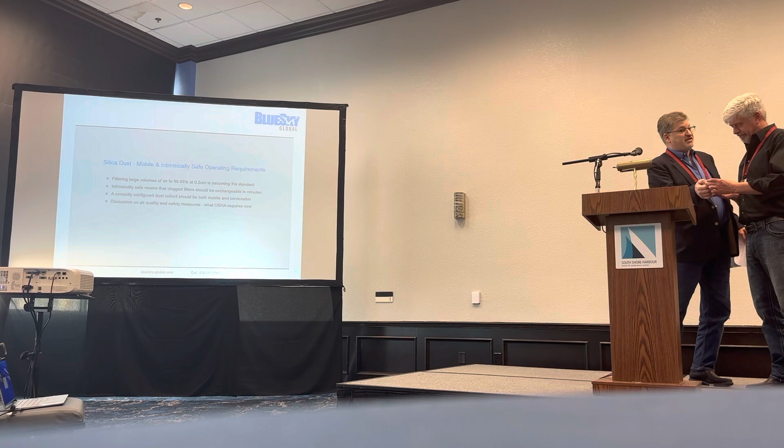So I'm going to be talking today about silica dust, particularly the type of dust you see around work sites that one breathes in. Typically, the experience of breathing in dust is that you'll get a gritty taste in your mouth, in your nose, that kind of thing. That is really not the dust we are particularly concerned about, because the body has quite good defenses against the dust you can see and feel.

So the stuff that we are concerned about is the stuff that can be breathed into your deep lung. And it's usually just nuisance dust, and we experience it in everyday life. The body is quite well adapted to dealing with it. People live in deserts and the wind blows.

However, silica has been discovered to be somewhat hazardous, even in low concentrations, but particularly over long periods at high concentrations. So this isn't really from medical studies per se. It wasn't an Erin Brockovich story. It was rather a statistical story, very much like dust that you find in woodworking factories, where they took a sample of people who never worked in a woodworking factory and compared their health over a period of time to people who worked at IKEA factories or something like that.

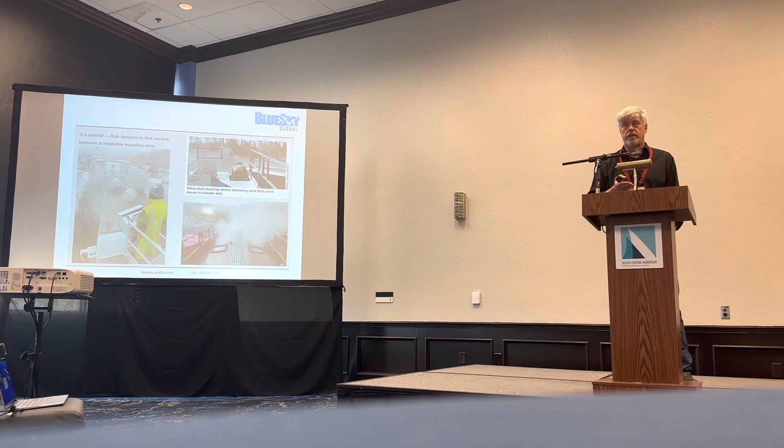So in a nutshell, OSHA is trying to limit, not eliminate, limit the exposure of people to the dust that they will breathe in.

So this is where dust collectors come into play. You see them on every frac site where dust is handled. These machines work. They have filters in them that are regulated, their efficiency is high enough that they comply with legal requirements, and they can be deployed.

I'm a mechanical engineer. I've spent my life working out at remote job sites, out in Kazakhstan, Saudi Arabia, India, terrible job sites. The problem with all equipment is not how it operates and what it's specified to do, it's this condition. It's where the job site is inconvenient. It's just darn difficult to work there.

So imagine you have to do a filter change in this environment. How do you do it in this machine? You have to open those doors. You have to pull 50-pound filters out, covered in concentrated, airborne, dust size fraction dust. That is a miserable task to do. So now we have the stuff that was floating in the air as concentrated cake on those filters. That somehow does not seem like the smartest thing that we can do.

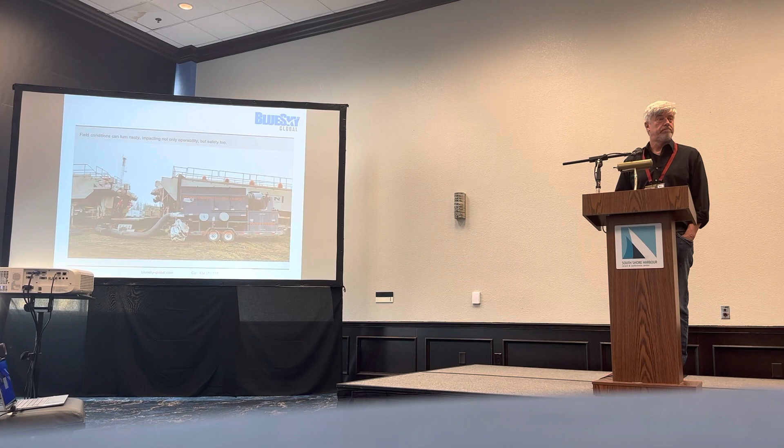Or the tires are flat. I'm sure you've all experienced that too. Now you've got to move the dust collector, relocate it, and one of the tires is flat. Well, you've got to change that tire. Or the engine's having trouble. These machines have pulsing systems. Often, when the dust collector goes offline, the battery is left connected, like leaving the lights on in your car. Now the battery's flat, the dust collector won't start. Or the engine has a problem, there's a bad diesel injector. So there are all sorts of real-world problems associated with operating a piece of equipment that is there for safety. So the equipment itself becomes the problem.

Filter changes. You say, okay, well, we don't ever see unscheduled filter changes. Most of the machines that go out onto site, their filters are removed from the top. You pull the filter, 50-pound filter, out through the top of the dust collector, through the clean air plenum. So think about that. You've got a loaded, spent filter, covered in dust. You are pulling it out through the clean air plenum. All the dust falls off that filter as you're pulling it out. So there's a man up there, it should be tied off. And the dust is falling off into the clean air plenum. How are you going to clean the clean air plenum?

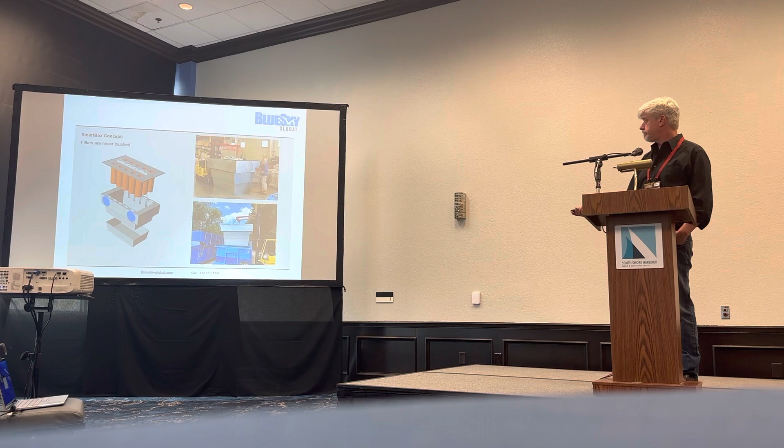Now because we've got a SmartBox, there are various options for what you can do with the dust. You can either capture it in drums or super sacks, transfer it with an eductor to a storage silo, or if you're putting it onto a transfer station on the conveyor, you can leave it open, capturing the dust from the conveyor and pulsing it straight back onto the conveyor.

We've all seen these huge transfer stations with the belts and a Donaldson or something mounted on top. Again, a nightmare to service. With this concept, you'd simply crane up a SmartBox. When it's time to change it, you take it down and put a new one up. No more servicing the filters, nobody touches it.

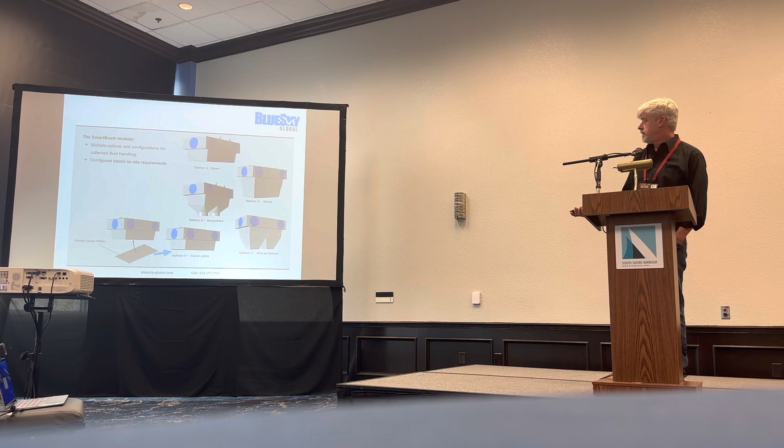As I said, there are various configurations you can use, plus more that we can embed to deal with that dust. One of our standard applications for sites that have bad ground is that we mount the whole system on a roll-off container. The dust can go straight into the belly of the roll-off, and you've got the dumping facility to recycle that. So this is one application where you can put about 10 yards of dust straight into a roll-off. When it's full, take the 10 yards, dispose of it, or just bring in a replacement unit and drive that off to somewhere convenient to handle.

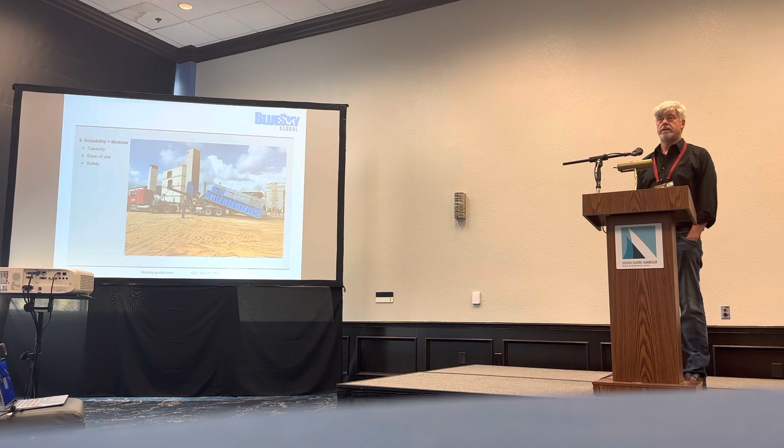So the beauty with a roll-off container, no flat tires. You can place that thing anywhere, in a mud patch, whatever. It's robust. It can be moved, it can be dragged. It's weather resistant, forklift resistant, and there's a lot of trucks that can move it around, remove it or bring it. So it's easy to relocate, easy to run.

Another thing with the modularization with these smart boxes is now you can create machines of different sizes. For instance, it can be several units tied together, all parallel processes. So you can have a very large unit or a smaller unit, put it on a flatbed truck rather than a roll-off container, whatever. You can have all these different units, and depending on the application you need, you just tie units together, like the memory in your PC.

You can just add banks of memory. So the size of the dust collector you need is now just a question of how many modules you tie together. By turning it into individual smart boxes with their own pulsing systems to clean the filters and their catchment, you can grow it indefinitely or have it really, really small. It can be a standby unit if you have other dust collectors working and you just need to bring it in during a maintenance outage. You can just bring in one of these units as a standard, it can go into just a box truck, anything like that. So deployment and modularity are key to the operability of a useful dust collector.

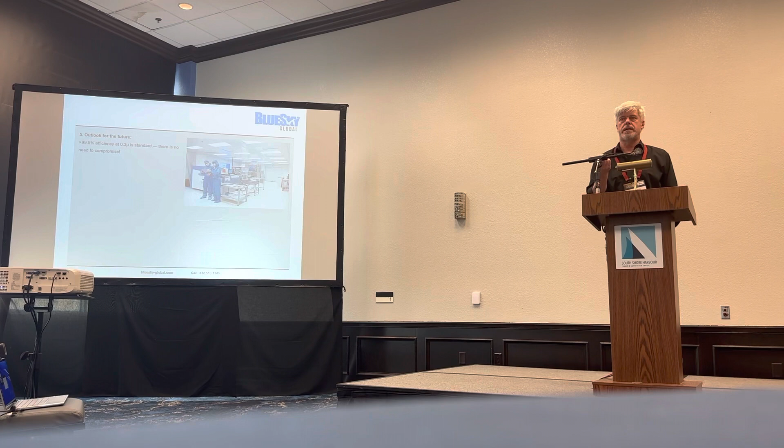So it's a very small fraction of the dust that's produced, and it gets into the deep lung, right down into the bottom, where it does small damage. It's really small damage, little cuts, little scratches, little irritation. And so what happens to the lung is because of the presence of those very, very, very small silica slivers, you get scar tissue forming in your lungs.

If you go to a respirator, scar tissue still forms, it's also a bad thing. So imagine breathing in silica over years and years, and systematically your lungs are developing scar tissue. Scar tissue makes your lungs stiff and changes their capacity to operate, to take oxygen out and to breathe out. This is what happens as we age, this accumulation of scarring.

Just like you will not get skin cancer from one sunburn, but if you're continuously getting sunburned, after some time your skin changes. It does not mean you will get cancer. In the case of lungs, it does not mean you will get lung cancer, it's a possibility, but certainly there will be a systematic development of scar tissue. So even though the rules of OSHA feel like a burden to productivity and costs, I think if we think of ourselves and the people we work with, it has merit.

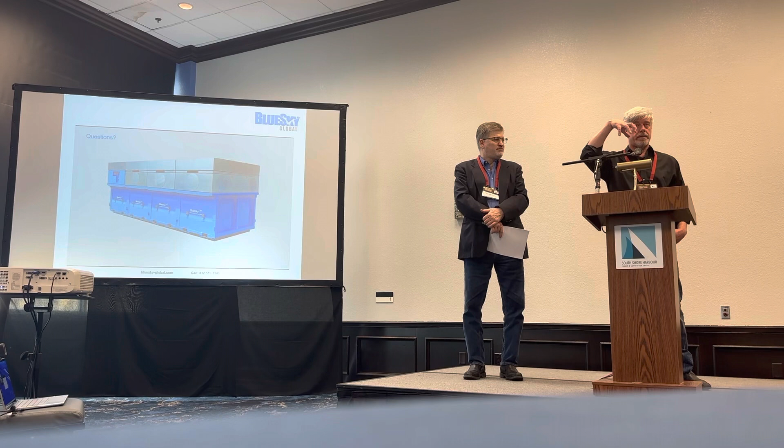So we've had smart boxes running for 3 years without needing any attention. The issue is really when some unknown contaminant gets into the unit. It is true with all filters this way. So we have a pulsing system. We actually have a system where we pulse and shake, rattling it off, and we get reverse flow.

So if the dust quality is good, they essentially have basically an infinite life. Let me qualify why that is true. You start off with your filter fabric. The filter fabric, when it's new, gets loaded with a layer. The filter is never clean again, so there's a layer on it. You want to make sure that layer on the surface of the filter is not compacted. If it becomes compacted, the filter gets blocked, and then it's time to replace the filters.

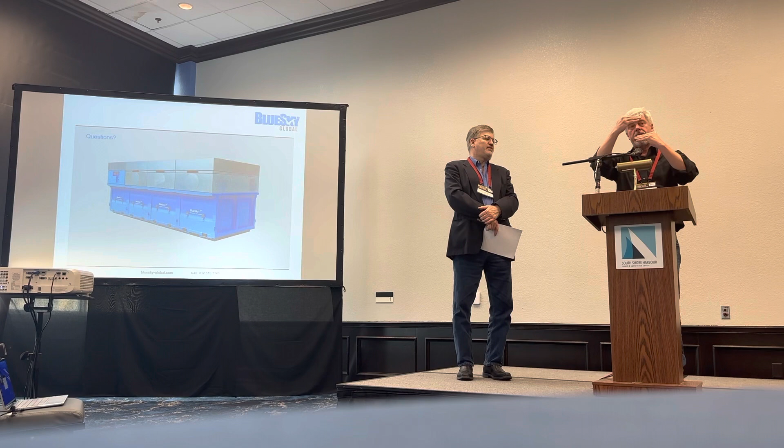So if you can keep that layer that touches the surface open and fluffy, as it were, through the pulsing, all the wear and tear on the filter is actually done to the dust on the filter, so there is nothing impacting. Over time, small particles will start working their way into the fabric and block the fabric itself. In our particular filters, we use a Teflon laminate to work against the impregnation of that fabric over time and systematically blocking them. So they don't wear out, and because of this Teflon laminate, it's a real film we put on there. It's not a spray-on, it's an actual multi-layered system. We're working against the filters plugging up as the months go on.

I don't know if that answers your question. It should be counted in years. That does. One more question.

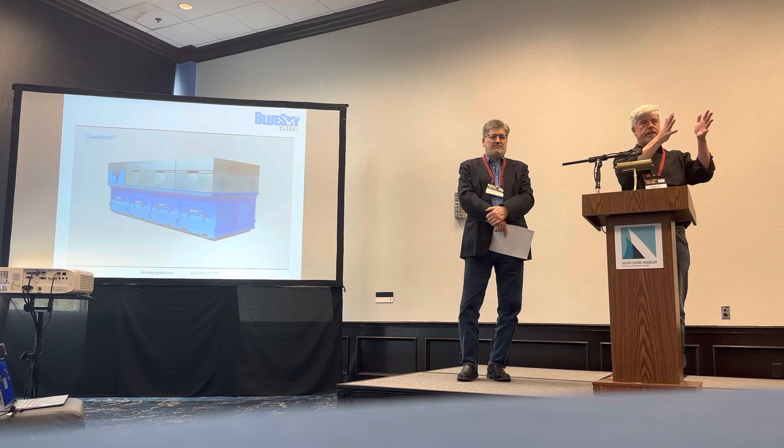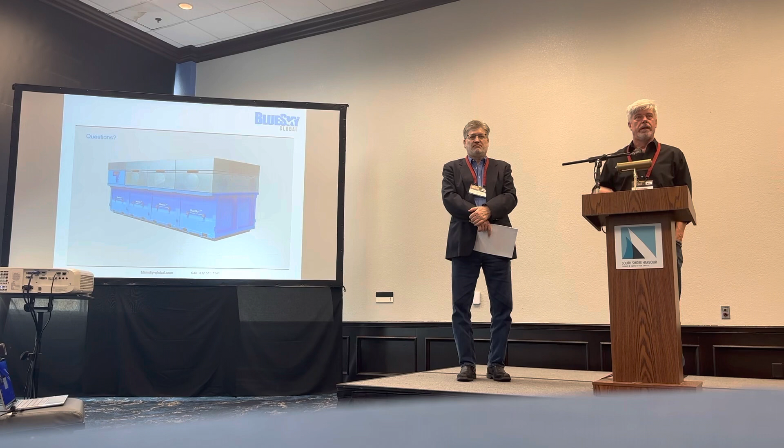Is there a limit to how many of those boxes can be put together? Well, there's just a practical size limit of handling. So we would say we don't like to go more than 6, and then you just go to a second unit, and a third, so you can stack them side by side. We've got one application we're working on with Tinker Air Force Base, where we're actually stacking them vertically, because they need 26, so they can go vertical or sideways. But there's nothing stopping them being used as a bank of lots of individuals, 6 tied together. It's purely a practical question of transportation, handling on site, what lifting equipment you've got, going offshore, whatever the limitations are—you can just bolt them together as you need.

Got it. Thank you. Okay. Another question from the audience?

Okay, I just have one, almost on the economic side. Is this the same cost as the traditional systems? Like we get the safety and the advantages, but what about on the cost side? Is this also saving money, or is it costing a little bit more? How have you figured out those cases?

Right, so the total cost is the same. Filters are the same, the steel is the same. The smart box in itself is slightly more expensive because we've added the box. However, that is immediately recovered on your first filter change, because at that point you're able to reuse this filter, but you're saving all the downtime, the labor, and everything.

So you buy 2 smart boxes, one goes in, the other one comes out, so you have to double up on that. The initial cost is an extra smart box, which you get at the point of servicing, so you own 2 instead of 1—like a propane tank, you own 2 propane tanks with your grill. But otherwise, the cost is the same, so after a year or 2, it's a net savings.

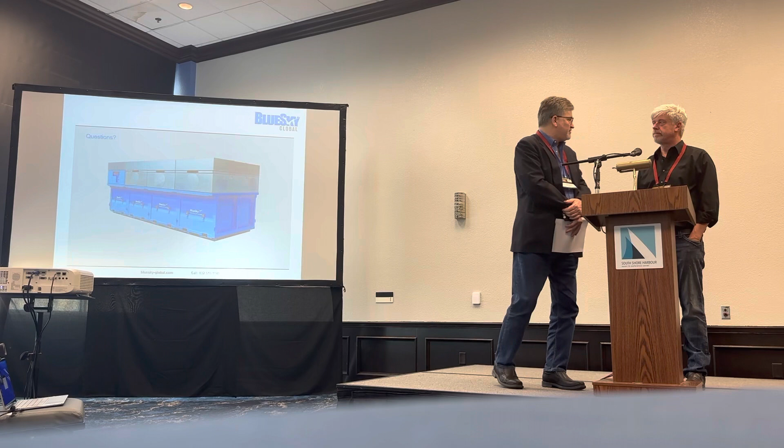Correct. Okay. Exactly. Perfect. Last chance for a question.

Everybody's thirsty. I got it. Okay, well, thank you very much.